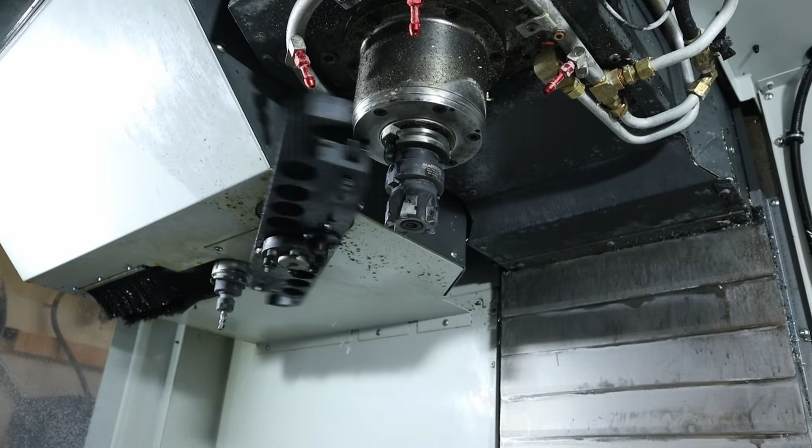I am the 26-year-old machinist trying to build a high-end bracelet and jewelry company to express my machining love for machine precision parts, little assemblies, and playing with materials, coatings, textures, patterns, all that type of stuff. So that's what we're trying to do.

Last week's episode, we built a fixture. This is where it gets awkward. I am completely changing this design, and I'm going to show why. Someone in the comments caught it in the last video, and I was also thinking about it, and I'll explain that in a second. But we were able to salvage a lot of the work that we did last week, so I'm happy about that.

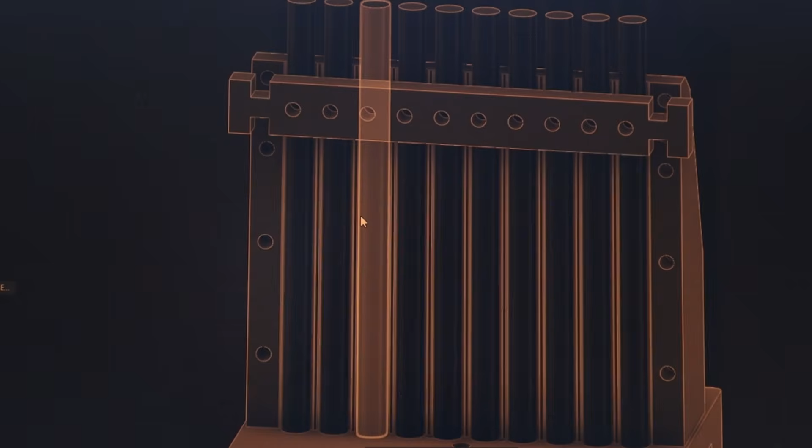So this was the current design that we have machined down there. We have our stock standing vertical. We were going to machine this angle for clearance. The problem with this was we were going to make some kind of locking bar that would screw into the fixture. We'd have our set screws here, and that would push into our stock. Somebody commented and caught this in the video, and I had thought of this already, but I wasn't sure if it would actually be a problem. The more I thought about it, I was like, man, I don't know if this is gonna work, because you'd have screws that hold this bar here and here, and then you're gonna have set screws pushing in, and most likely those set screws are gonna bow this bar out, and in the end there's just gonna be zero clamping force on these actual dowels of material.

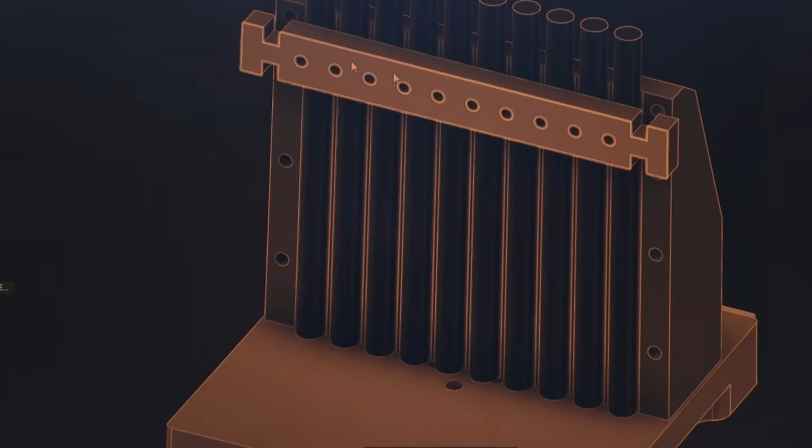So we have two options here. It is currently 9:30 in the morning right now, and we can either spend probably an hour or two to machine this bar and test this theory, or we can completely ditch that method. We could still use this fixture because we have it mounted vertically, and we can do this method that I thought about a long time ago.

It's like this fixture saga at this point, but it's fine because we're learning and having fun, and we're getting content out of this.

This is currently the same block on the pallet. It's offset because our stock was offset, but now I want the stock to be on center. I'm trying to salvage as much work as we can, since we already have this block machined on all sides and already mounted to our fixture.

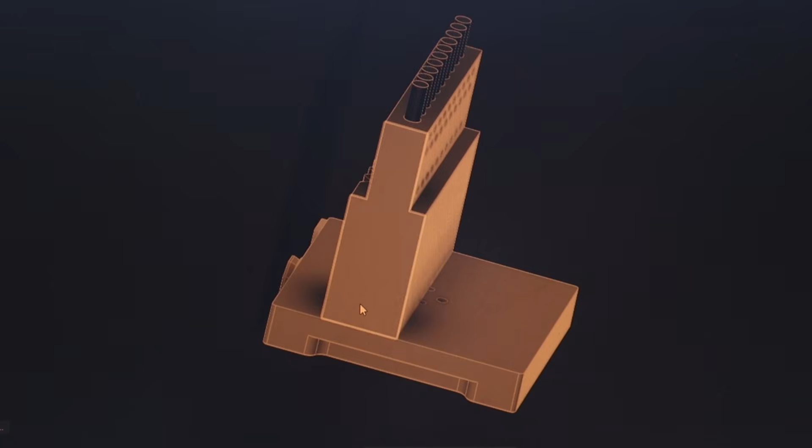So what we could do is take the same stock and drill a hole all the way through. This piece of material is right around 5.1 inches, but the drill I have is only about 3.5 long, so we'd have to drill from one side, flip it, and drill from the other side.

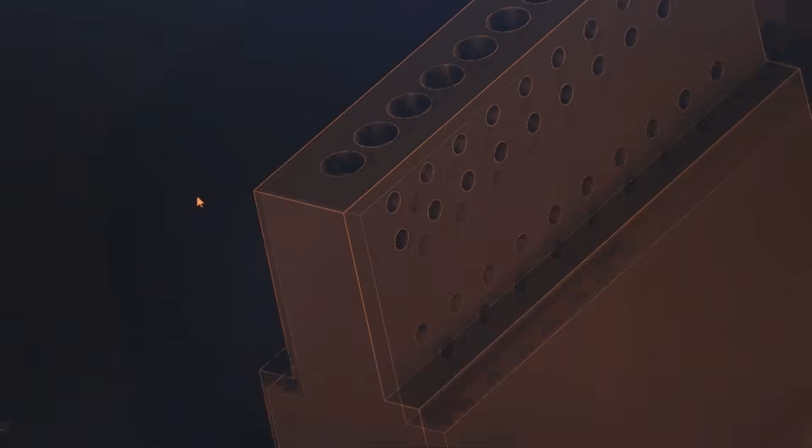Basically, we want to create these holes that go all the way through so we could stick a bar all the way down there. Then we could create relief cuts here so we can get in and machine the parts without any collisions, and then drill and tap holes for our set screws.

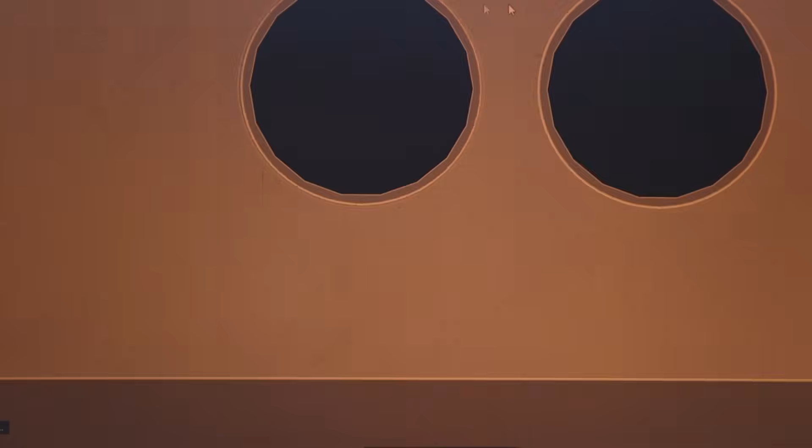This way, wherever our stock went, our bar will be pushed up. Technically it'll be like this—if we move this, it'll be pushed up like that, and there'll be a set screw here pushing it up.

Now, I understand it's not a V-block, and this is technically 2 points of contact. However, I think this is going to be plenty strong, and this eliminates the flexing problem we mentioned, because this is going to be one solid piece. So the simplicity is definitely here.

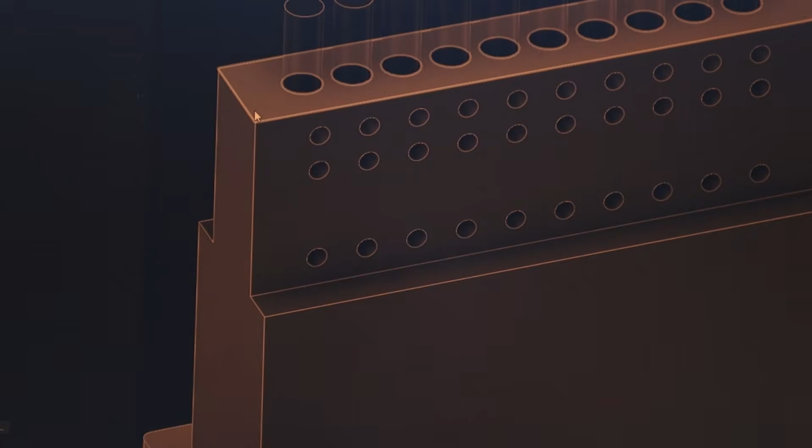I like this. There's a few things we'll have to think about, like machining a cross hole along this to let coolant and chips flow through, and maybe a slot down here—because if I'm machining these parts and pulling this bar up, and I drop it, say it's half the size, it's going to fall in that fixture and I'll have no way of getting it out. If I had a little slot down here, I could use a screwdriver to flick it up and grab it.

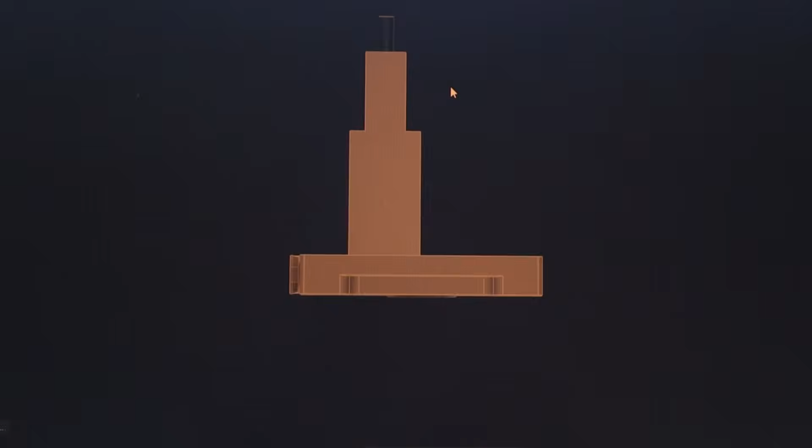I think this would totally work. It's not ideal that this is currently mounted offset pretty far from center line, but it will work because we can easily work in this orientation for literally 90% of the machining. The only reason we flip it is to machine the tab feature, and that's about it. As long as we have plenty of clearance from here to here, which I know we will, we can even put the tool in a longer tool holder if needed.

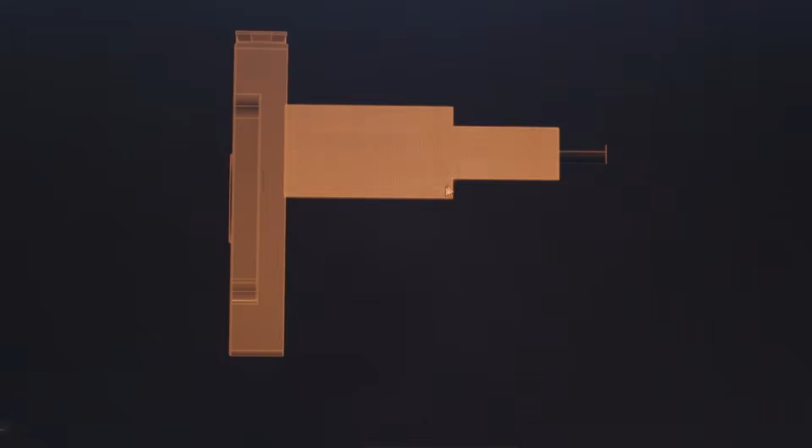Obviously if this was on center, that'd be more ideal, but my whole point is we can make this work, test this theory, and save a little bit of time by not having to remount this to the center of the fixture and drill and tap holes again. So this is what I'm going with.

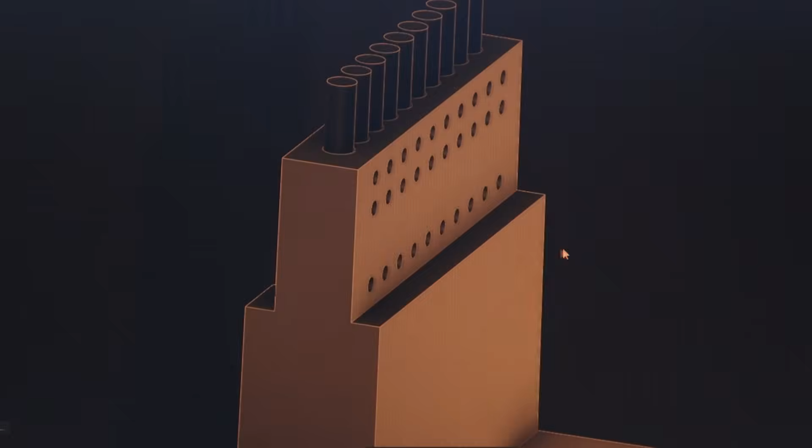So now I'm just making sure I like what I have here, and going to program this, and then we're going to go downstairs and machine this.

What we're going to do is take this piece, counter bore some bores here, 10 bores, and then come in and drill it. That will be my quote-unquote center drill, to try to keep this drill as straight as we can. We're going 3 inches down, then we'll flip it and run this exact same program. Since we're probing on center, we can do that, which is actually really nice here.

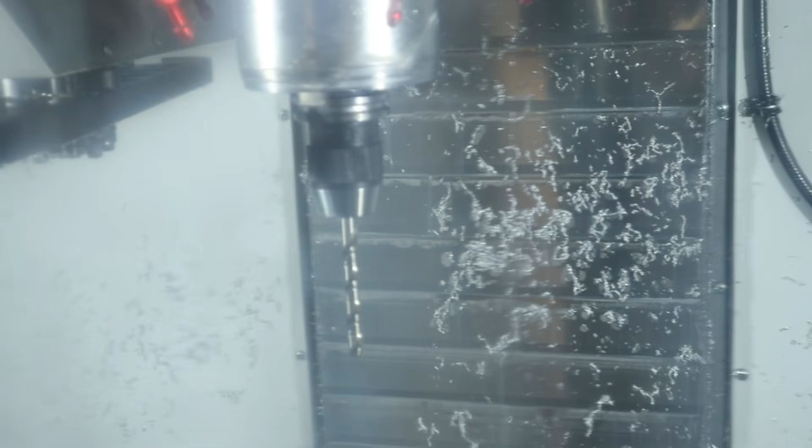Alright, Mr. Drill. So we're going at 1200 RPMs, 1/8 inch peck. Yeah, I think this is going to be fine. It's just going to take a while here.

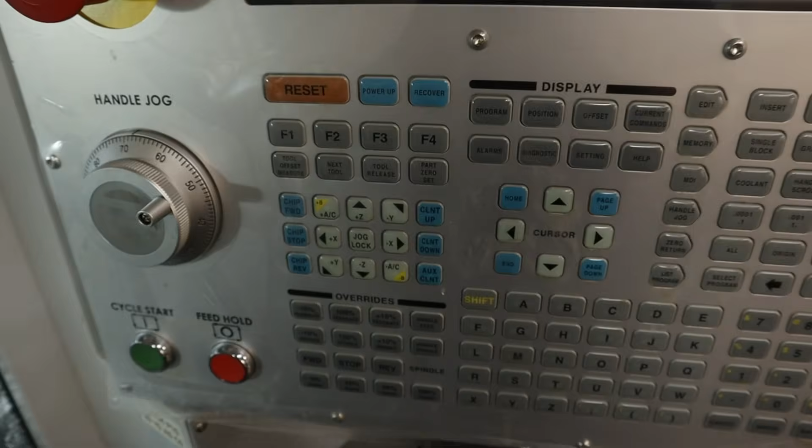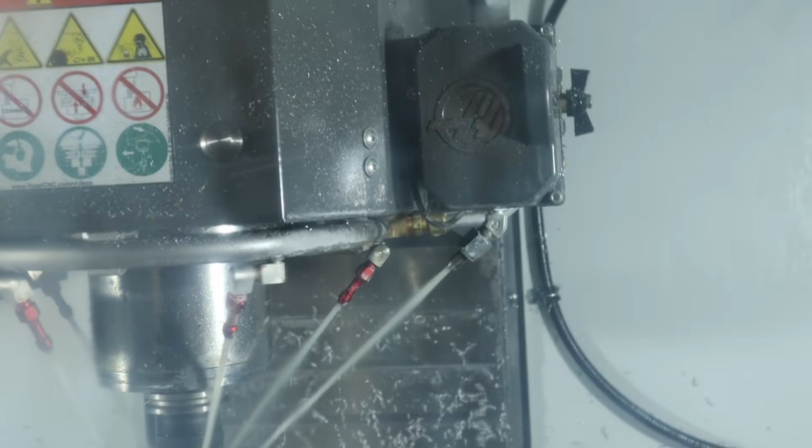So a little backstory while this is doing its thing. When I bought this machine, I had automation in mind, and I bought pretty much every option you can get on a VF2. So I've got the programmable coolant, which I thought was kind of a gimmick product, but it's really nice when you have it. So I have these controls here that I can adjust coolant up or down, and in my offsets page, we're on tool 26 right now, we have a coolant offset. So right now it's set to 11.

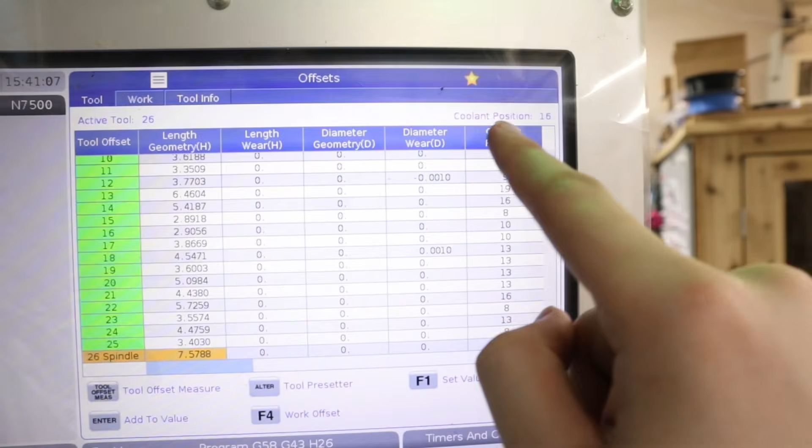So if you look, this stream of coolant is pointing right there. That's too high up for what we're doing. So I'm just going to hit coolant down, and I can angle that down to be more at where the cutting action is. And so that just changed. I have a coolant position up here of 16, so we can go over here and input 16, and if I hit F1, it'll update that. So now every time the machine changes to this tool, just this one coolant nozzle will adjust.

It's actually really handy because, as you guys probably know, those coolants around the spindle, you manually adjust, and they're not always pointing at the right height. As you can see, I'm blasting the holder right now, which is kind of pointless, but to have at least a few coolants hitting the tool, that's all you really need in this case. So again, I just wanted to mention that's really nice for certain applications.

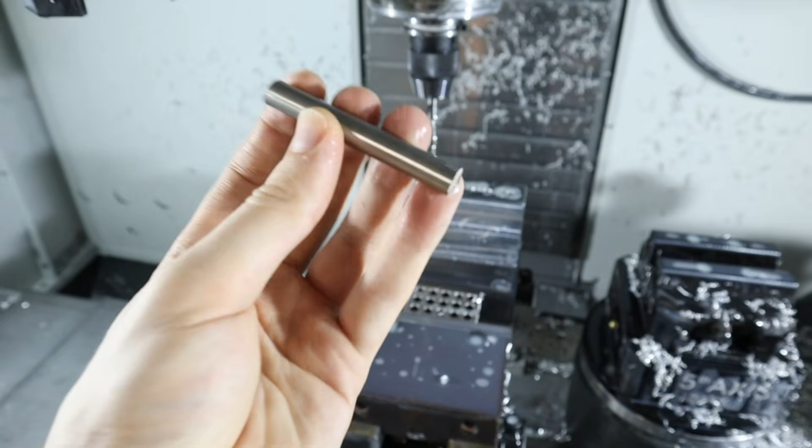Okay, I've drilled 2 out of the 10 holes. Before we go any further, this is a piece of our stainless steel round bar. I just want to do a sanity check. It does fit, there is slop. The reason we are doing a 406 size hole is it's a little bit larger than 3/8. That way, in case our stock comes oversized, we still have a little bit of clearance. So that's the reason why we aren't just doing a 3/8 size hole.

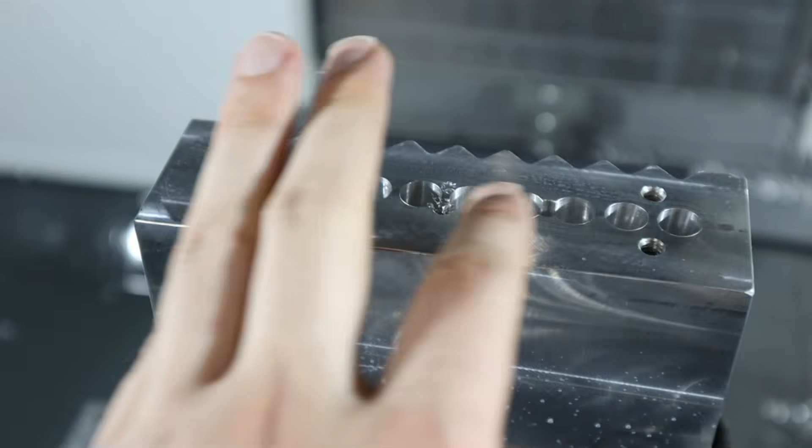Obviously go a little bit higher, so we're about 30 thou larger, which is totally fine. So that's why we're doing it. Looks good, let's keep drilling. Bada bing, bada boom, the holes are drilled. I'm going to touch these with the chamfer tool, flip this, probe it, and we're going to run the same cycle again.

All right, I have a hot take. In a situation like this, this is the face that is going to be down on the pallet, so all we need to do is deburr these holes. Yes, I could have added that into my machine, but all I did was grab a 90-degree countersink. I have these, I literally just hold it in my hand and I deburr these holes. It takes me like 10 seconds, a lot quicker than programming it and running the risk of anything on an expensive machine like this.

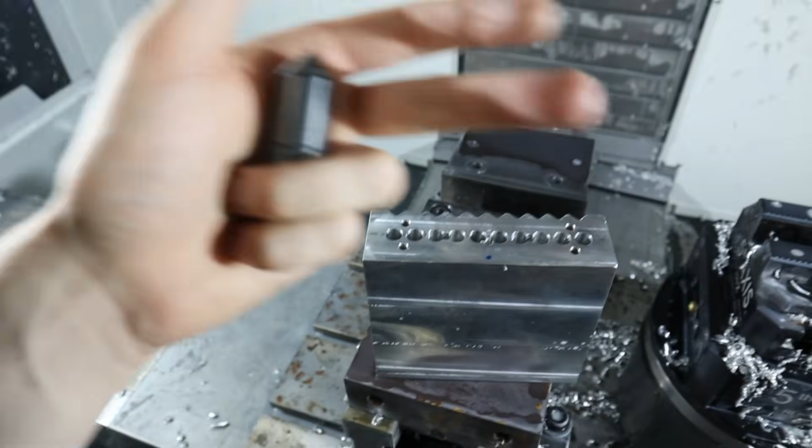And I think what makes a good machinist, in my opinion, this might be controversial, but it's knowing when to go fast and when to go slow. In a situation like this, it's faster to do what I just did, and there's no tolerance to these chamfers. It's literally just an edge break, you're never going to see it again. If this was a cosmetic side of the part and I was making more than one, and it was for a customer, obviously I would do this differently. But you have to identify the scenario that you're in and move as quickly as you can when you can, and slow down when you also can, or you know you need to.

So I'm curious what you fellow machinists out there think about that. I think going slow in certain situations is necessary, but when you can go fast, move on. So curious your guys' thoughts.

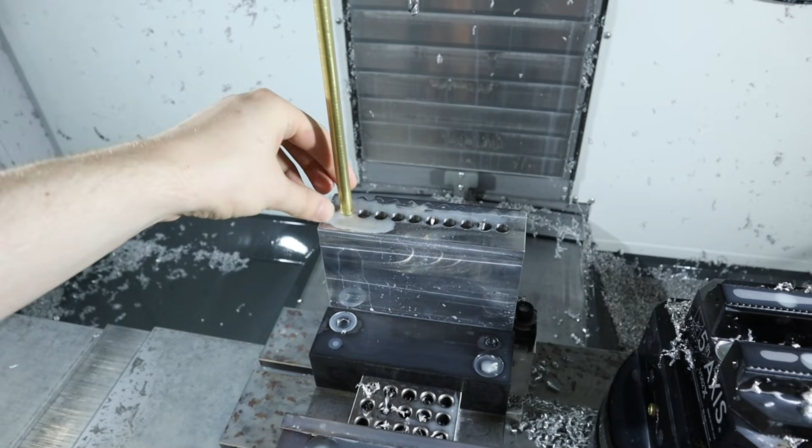All right, we drilled the first hole. So the hole definitely went all the way through. Let's go ahead and run it, and then we can take it out and look through the bore and make sure it's just, I mean, obviously it's going to be a drilled finish. We could ream it, I don't think that's necessary though, and as long as it's somewhat straight, that's all I really care about. But let's keep on drilling.

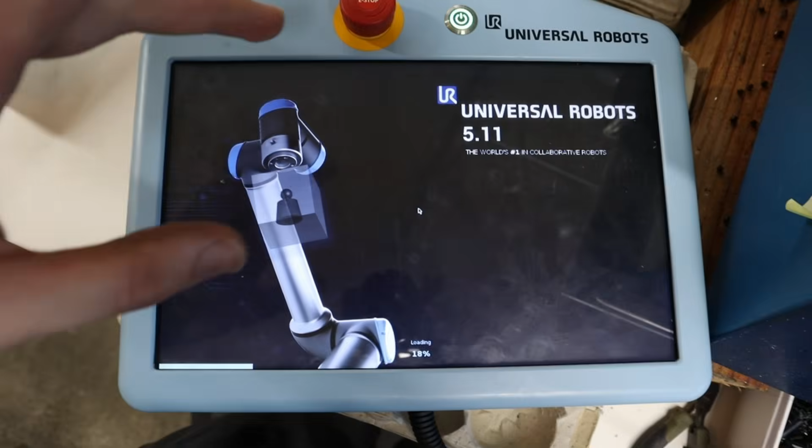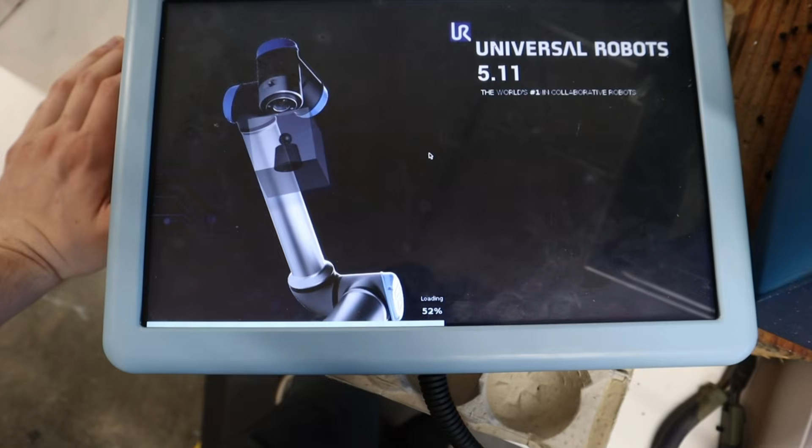So I have to turn on the universal robot because the I/O is set up to actuate my RockLock. So the only way I can take that 5th axis vise on and off is by turning this on and using the I/O here, which is kind of funny. It's kind of annoying, but I don't normally take the vise on and off that often, and I'm not using the robot, so it's just one of those things.

But we'll turn this on and I can show you how I toggle the I/O on the RockLock. Okay, I don't know if you guys will be able to see this. Maybe if I hold it up to the light.

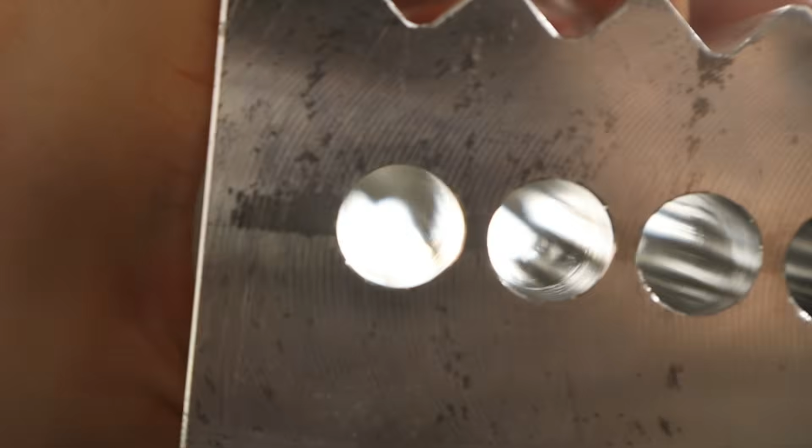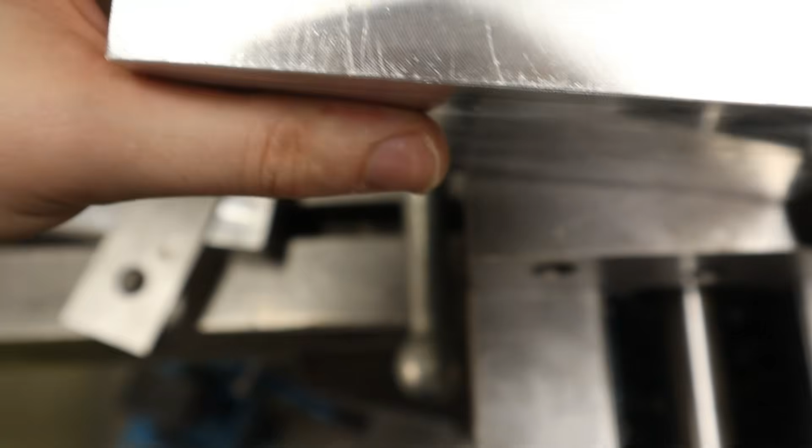I'm actually really surprised at how well this worked out. I think looking at it, the holes matched up definitely within a few thousandths, maybe even better. So I'm very happy with that. I even took a piece of material, put it in there, and pushed it up to one side to see if I could feel like a step in the center there, and I couldn't. So I'm very happy with this.

It's also funny how lighter this is already from all the metal we've taken off. So I'm going to measure a few things, make sure that this is where it's supposed to be, and then we're going to set this up. Actually, we're going to remount it to the pallet, and then we're going to put this in the 5-axis, and we're going to mill some features on it.

So we got lucky that the dowel pins still have enough of a surface there, and our threaded holes are good there, except for this one. I still might thread a bolt into there, and the only downside of these is that's going to remove like 3/8 of an inch that our stock can go down. So that either means our stock's going to stick out 3/8 of an inch longer, or our initial blank size will be 3/8 of an inch shorter because they'll be hitting that on the bottom.

But after the first part, it won't matter. So that is something to consider. I could move those over to gain that back, but I think for now that's totally fine. So let's go ahead and put this back on the fixture plate, or the pallet itself.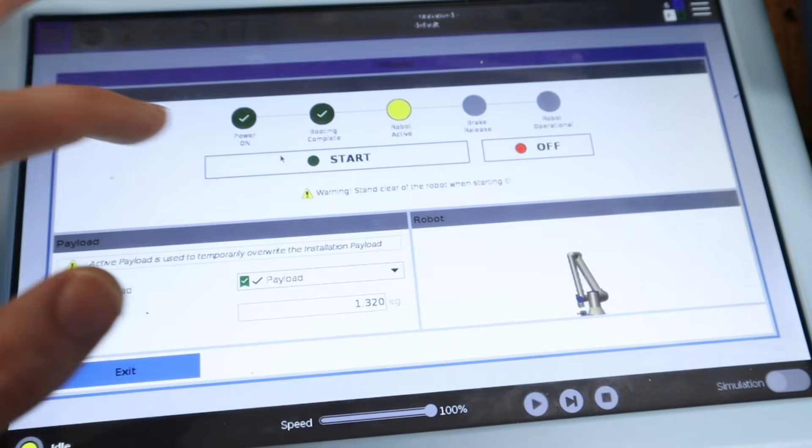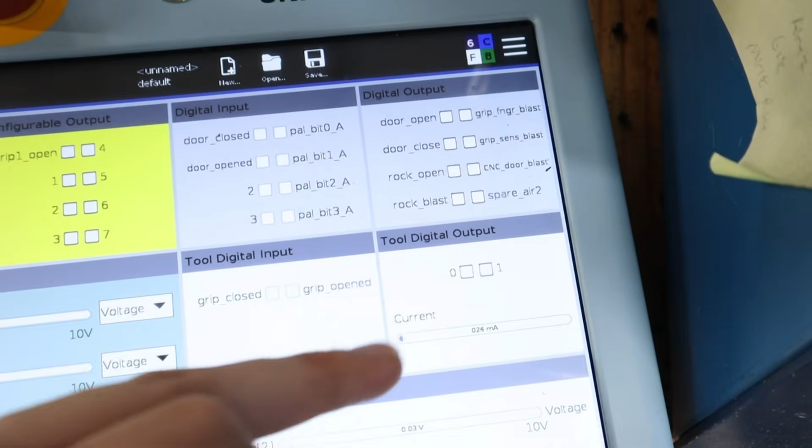All right, so first step, got to turn the robot on. And then we can go to our I/O, and then we have the rock lock open. So now this should be able to come off, which it does.

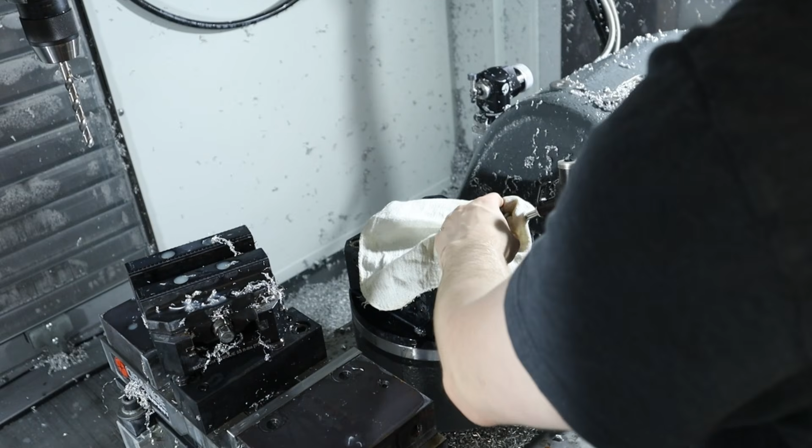And we're gonna have to clean this bad boy off. Since I don't use this a whole lot as far as swapping stuff, at least right now, I try to clean it pretty good. It can get pretty dirty and packed with chips. It's actually pretty surprising how much chips can get in there, even though there is a vise sitting in it.

So, okay, I'm fine with that. So now this guy, let's see, it would go on like this with the robot, so we probably should stick to that. So now I'm going to go back over to the robot control, hit rock lock off, and this should suck down and be set to go.

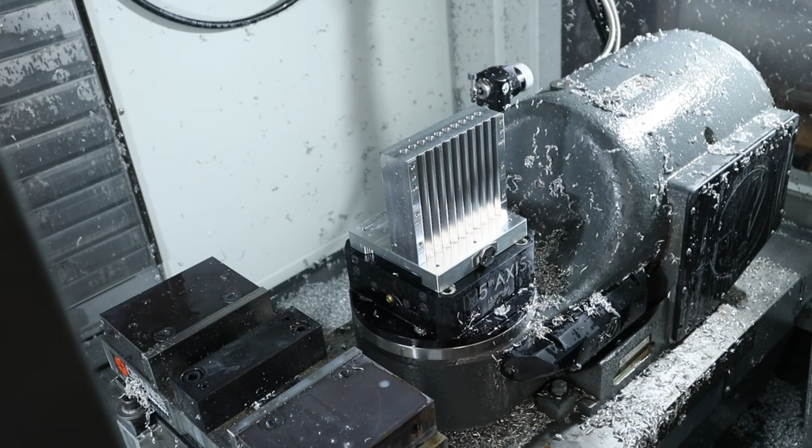Okay, I'm going to take this guy out of here because this thing is kind of a beast. Take him out, and then we are going to have to probe this.

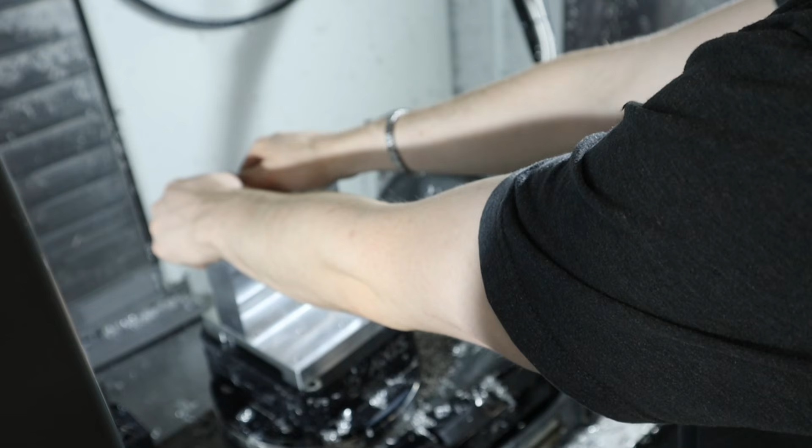Yeah, this is exciting, this is looking good. So, yeah, now I got to probe this, make sure it's in the right orientation, and yeah, we should be good to go on the next op.

Well, that's not going to work.

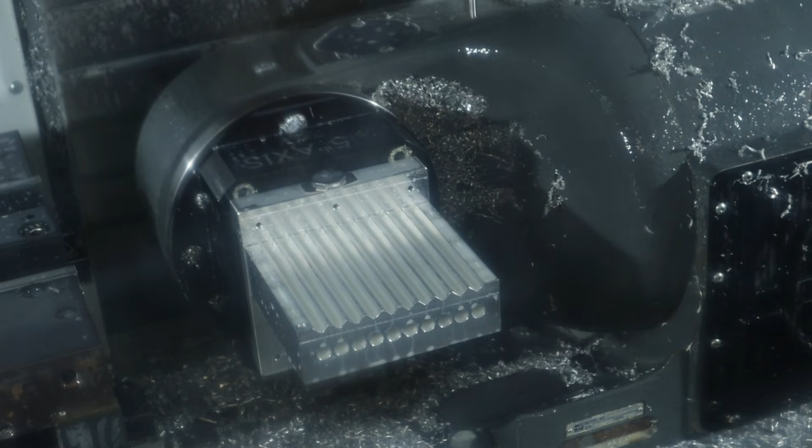We got our post working. That took a lot longer than I thought. Now, we should be off to the races here.

This is definitely a heavier cut than I thought I programmed. So with that being said, I'm gonna go double check that.

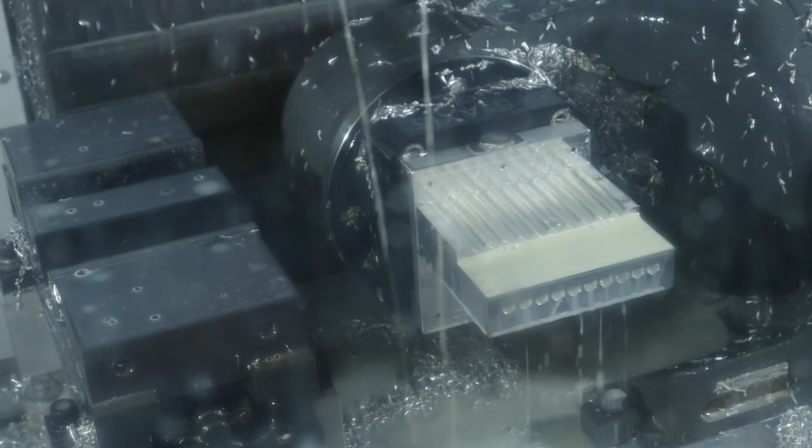So that's the cleanup contour right there. Okay. So before that moves, let's go ahead and take a look. Perfect. So we cleaned up that edge. Again, that doesn't really matter. But yeah, this is looking good.

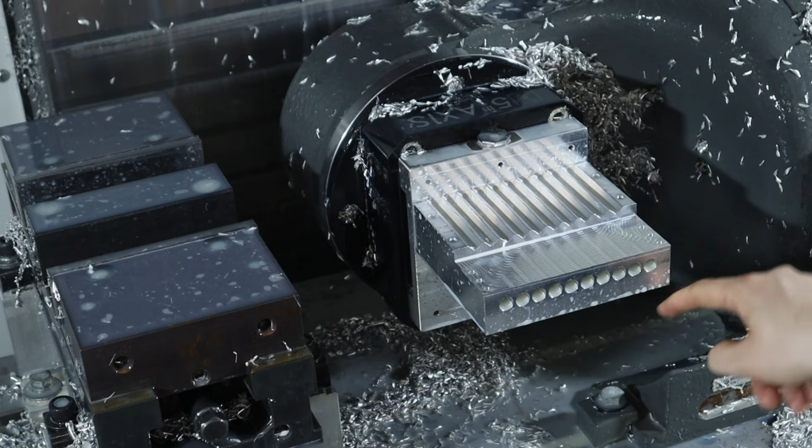All right, so now it's gonna flip over. You're not gonna be able to see that, unfortunately. Hopefully this tool's long enough to get in here. This is gonna be kind of tight. Oh boy.

That's as low as it's gonna go. And that's as far back as it'll go. So I think we're good. I don't think you guys really need to see that happen again, so I'm gonna go ahead and turn the camera off, machine this, and I'll come back.

You can see what I mean with this not being on the center line. Definitely need longer tool holders to just give us a little bit more clearance, just to make ourselves feel a little bit better.

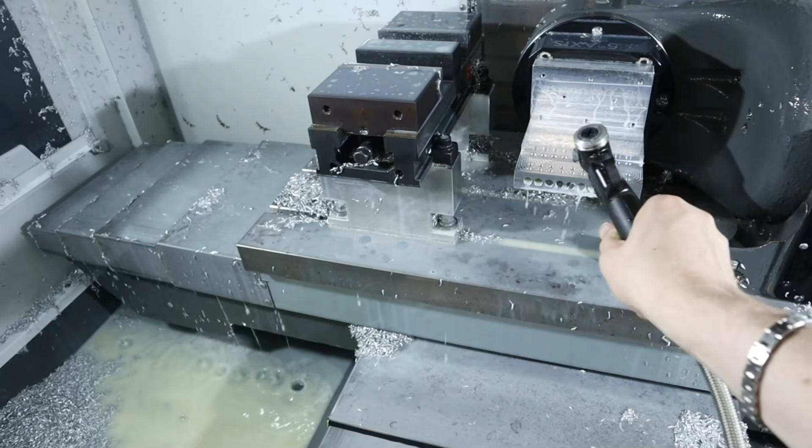Through spindle coolant, and we'll come back, chamfer and tap, and then I think that'll be it for this fixture, guys. All right, we got chamfers, time to tap.

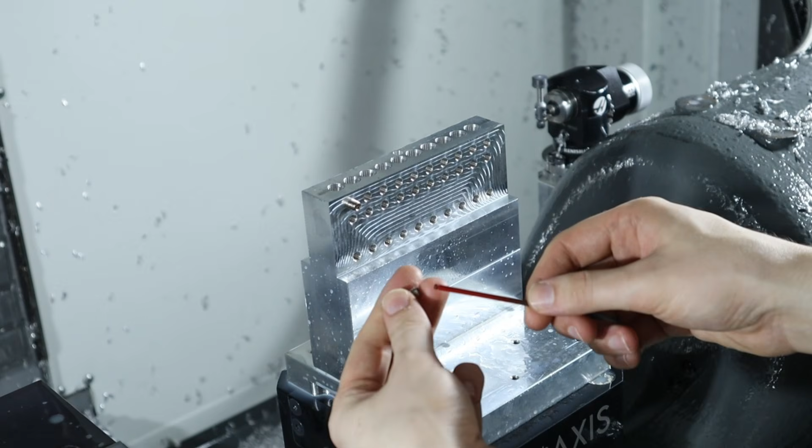Okay, fixture is done. Moment of truth. Pre-thread those in. We're gonna have to deepen that edge, but is this piece gonna be long enough? Yeah, so this is what I mean. I can easily drop this and lose it.

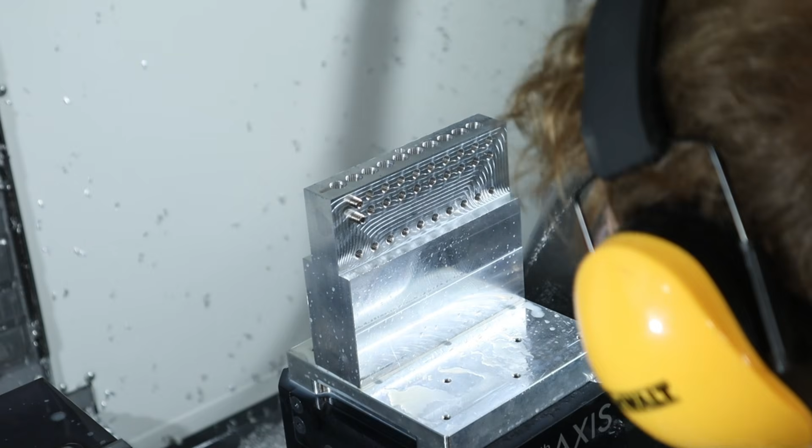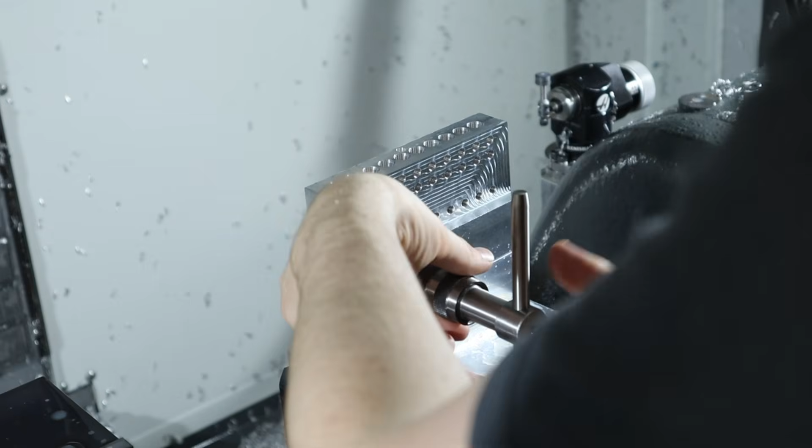Let's see here, what's going on? I don't know if we went all the way through with our tap, so I'm gonna have to manually retap that a little bit. So it looks like I didn't go deep enough. I could have sworn I did. We'll just test this first slot or this first position. Because yeah, I was putting in the set screw and I was like, why is this bottoming out? All right, there's that one.

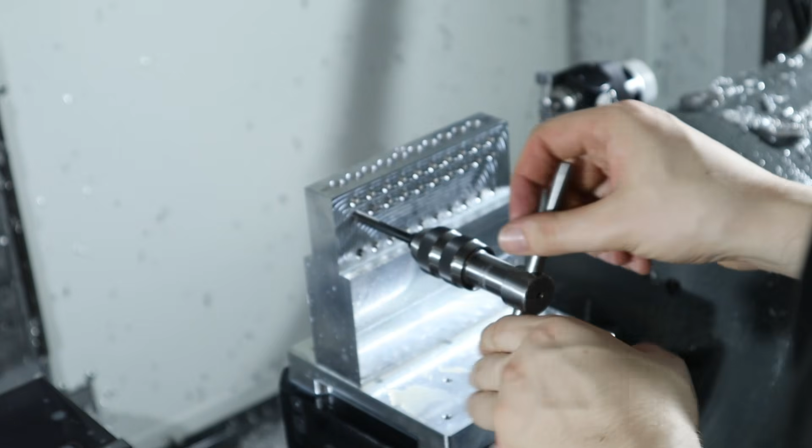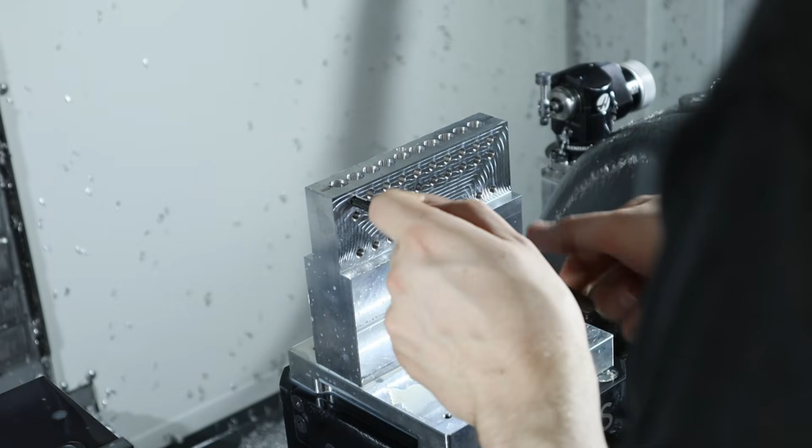All right, let's do this top one. I'm gonna have to break some of these edges up top. Just enough of a chip that would stop that set screw from going in.

Let's try this again. All right, there's one — I'm just snugging this right now. Two. Okay, so those are just snug. Now let me actually give that a little bit of English.

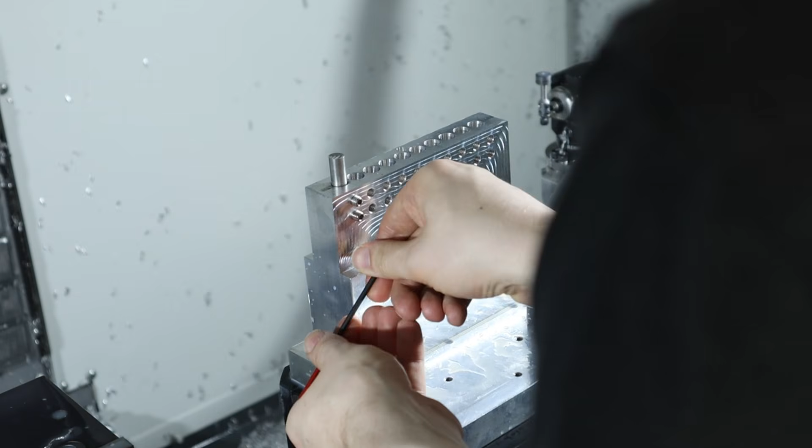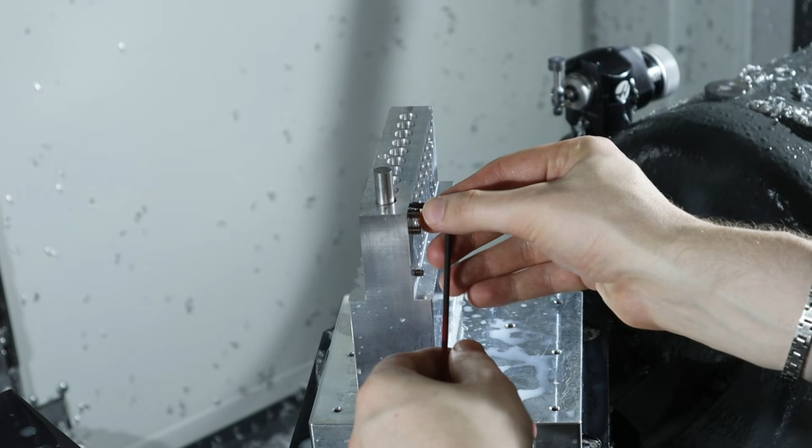Oh yeah, I don't think that's going anywhere. You guys still see that? Yeah. I think that's gonna work. We can figure out a torque spec, but I think that's gonna work, guys. I'm liking that a lot, actually.

So here's what I'm gonna do. I'm gonna edge break this. I might put that tap in a drill and just clean out those threads, go all the way. And then I'm gonna cut some pieces of material and let's pretend to load this up.

So one 3-foot bar gets me 2, 4, 6 — six-inch sections, roughly. One's a touch shorter, that's just because of the blade width probably. So in theory, the way I would load this would be — so that's the long one, because of that screw.

So yeah, this is what we gotta figure out here. Okay, so that's the short one, and this will also be a short one. So the question is...

Is this too long from a machining perspective? I know we're starting to get close to our Y travel here, so it's probably best if we actually put in a tool and see how far out we can go. So let's go ahead and do that.

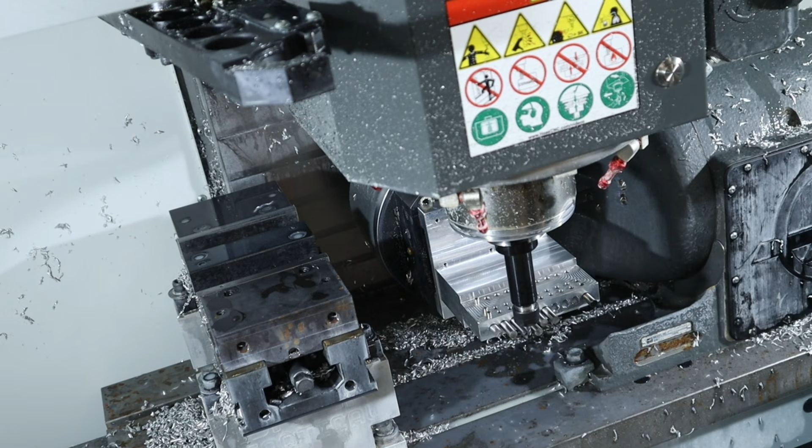I think if we get this out of here, we get this table closer. So I think this longer length is actually okay.

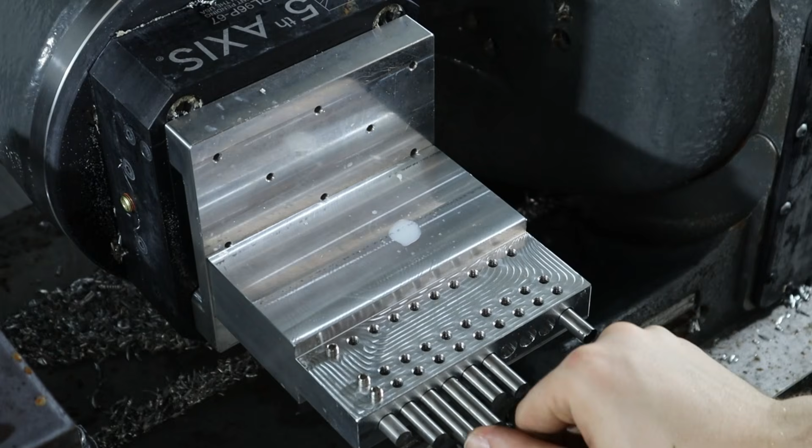Hey, when you're good with the bandsaw — that was supposed to be 6 inches, it's not bad. So like that's a long one, and then it'll go in even more over there. So I think we're fine.

The question is, obviously this is more rigid than this because it's sticking out probably another half inch, but I don't think that matters in this case. I think we're fine. So what is the rough number here?

Call it 1 3/8, it's sticking out. So if that's our number, we're gonna have to make a little fixture, maybe a 3D printed thing that goes under here that we can push all the stock up against this ledge and then tighten them down.

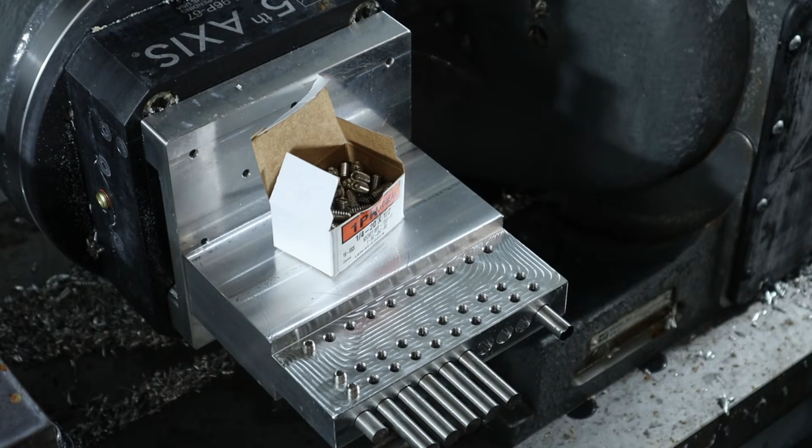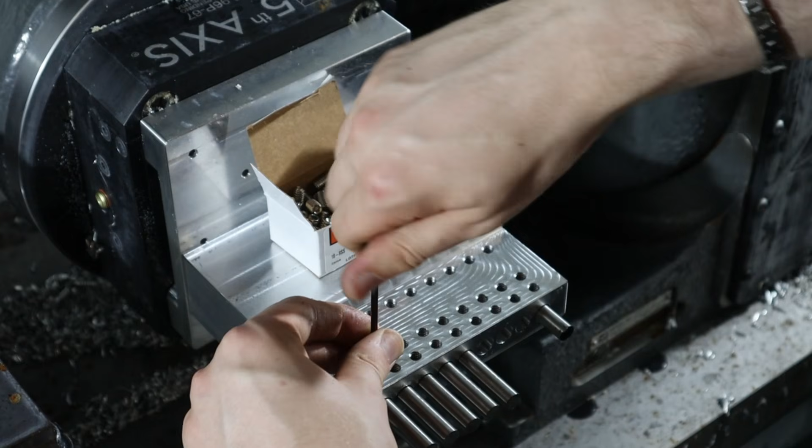But let's go ahead and put some set screws in. Now, one thing I don't like about these set screws is I don't know if they're metric or inch for the hex. Metric is sloppy, inch is also pretty sloppy, and I don't want to strip these. So I'm curious if McMaster sells some with a Torx pattern or something, because I just know these are going to strip.

Now, one other thing I do want to show — I can show you on this piece of material here. I think this is going to be extremely rigid. I don't know if you're going to be able to see this, you're going to have to trust me, but there's some pretty good bite marks from the set screw, and I think that's acting almost like a Talon jaw.

Yeah, so we definitely need a little printed something or other to set the length. I guess for now we can probably just use — yeah, I definitely want to make a little fixture. So that's something we can work on.

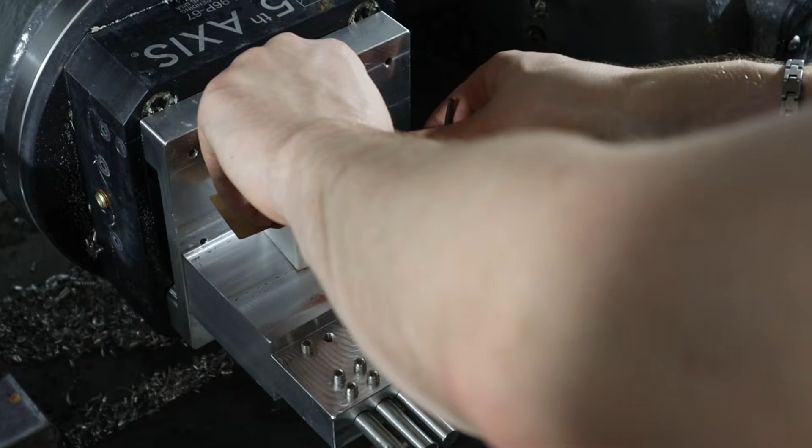But in the meantime, I'm just going to thread these in. So I think I want to get a Torx pattern or some other drive for these set screws, and then shorter — there, you can see a little bit long here. These might be good for the smaller stock when we plan to make the screws, but for now they're kind of a clearance risk.

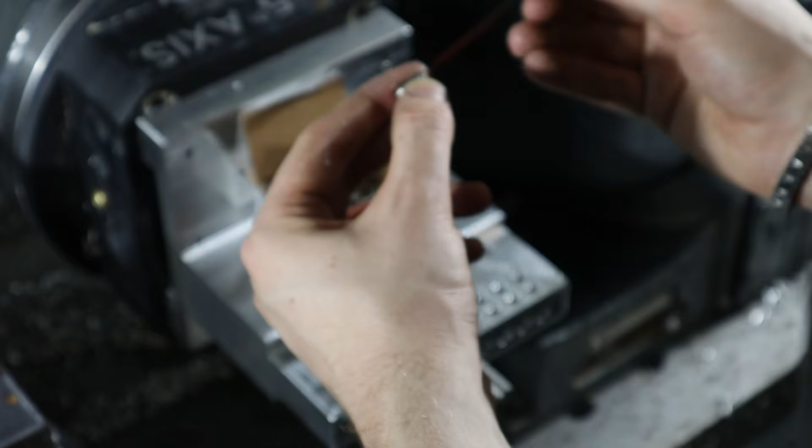Now the other thing I'm curious about — if anybody has some good links to where I could get steel instead of McMaster. Love McMaster, but I just know it's not the cheapest. It would be really nice to get this pre-cut to 6-inch lengths. Another thought is finding a Swiss shop with their remnants and drops, if they have 3/8 material that I could buy for cheap. So if you guys are working at a Swiss shop and you have remnants in 3/8, I'd probably be open to buying almost any material.

It's nice loading this when it's at 90 degrees here, because I don't risk losing the bar in the fixture. I guess with this being the first bar, that's not really a risk.

So I'm just snugging these, but I definitely want to make a fixture to make sure they're all at the same length. That's going to be pretty important, so we can do an initial facing pass to kind of cut them to length more or less.

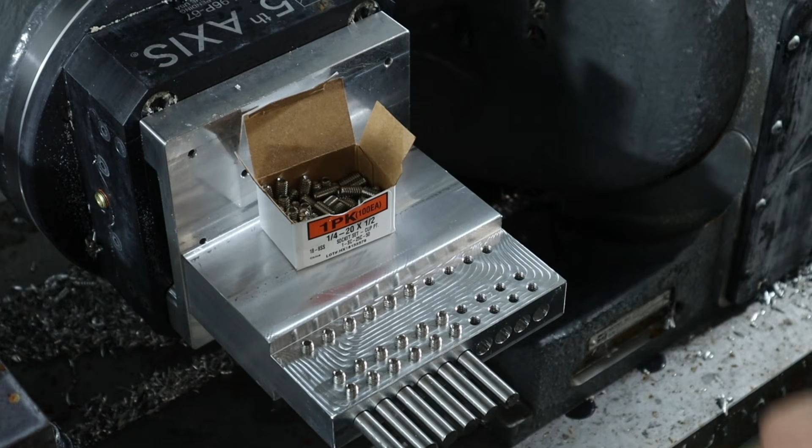All right, those are just snug, and I'm very happy with this. So I'm going to put in the rest of the screws. Actually, maybe not. It's kind of a waste of time.

So let's see. I kind of want to go design and print that fixture real quick. That wouldn't take that long. I might go do that.

Okay, I made a 3D printed jig. It fits on there, and we can slide these out, and it should be 1 3/8, which is what we want. Yeah, this is sweet. So I can just hold this.

Some of these are still tight. So I did this, and while I was waiting for this to print, it took about an hour, I actually programmed and patterned to machine 10 links. So we're gonna go for it, guys. I want some significant progress this week.

What's nice is I can actually rotate these and I can see if there's like a high edge or not from the bandsaw. It's actually really nice.

Okay, so we'll hold that. And we can just go in and snug down just one screw at least. And again, in full-blown production, a pallet will be running while we do this offline, because this is a little time consuming. Okay, so yeah, those are all snug just on one screw, but I love that.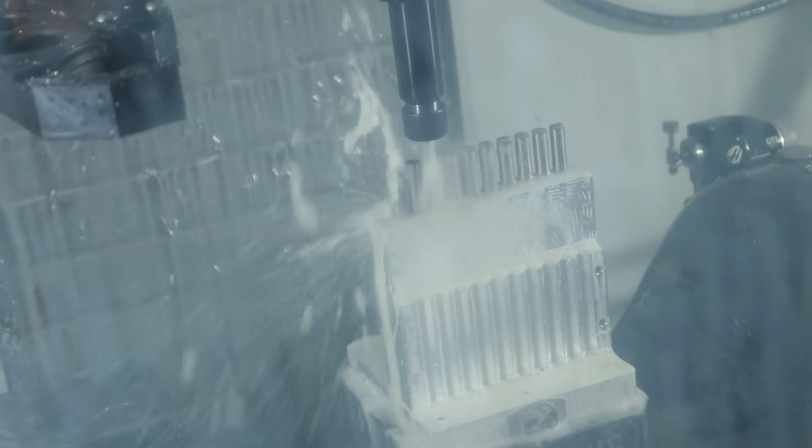And of course you guys can't see anymore.

So here's a good example of where I think we could save a lot of time if we made one continuous tool path to do what it's doing now, so there's not all these retracts. I mean, that would be, if there's 5 per part, let's say, it's probably more.

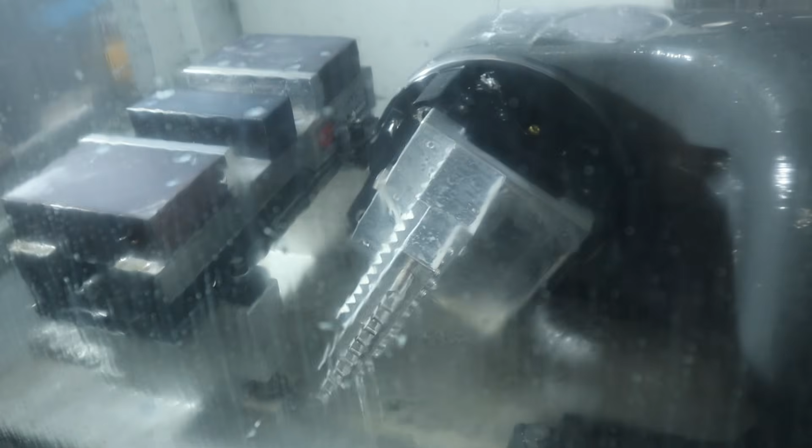All right, let's see, what are we doing here? We're just facing the back.

So yeah, I'm trying to think of everything I can that would speed this up, because we really got to be able to make these pretty quickly, like I've been saying.

It's not from a, oh, I got to be extremely profitable, but a bracelet's going to have like 50 parts in it. And even if I sell it for $500 or whatever it is, I mean, that's only $10 a part. There's a lot of work that's going into these parts, a lot of labor on top of the machining time. So I just got to make sure I can get the hourly machining rate to something that's not like $40 an hour.

Okay, so we're facing those off. Do you guys like the commentary as we machine? All right, what are we doing here?

Okay, so yeah, we're doing this roughing again. I think that alone could save 3 seconds per link easily with the retracts like we're doing right now. 3 seconds per link per side, so that's 6 seconds per link. 6 times 10, 60 seconds. I think we could at least get a minute off this program from doing that. Plus the finishing, maybe a minute and a half.

All right, here's a great example. This fixture was just flipped 180. We chamfered the parts on that side just fine, plenty of clearance. Now with it being a few inches lower, it's chamfering here. By the time it gets over there, I don't know if you can see that, that sheet metal would definitely crash into the probe. So I'm gonna pull this tool out and put it in a longer tool holder. Even something just like this would make a huge difference. So let's go ahead and do that.

Okay, I went with a way longer tool holder just to be safe, and it was open, so hopefully the run out is fine on this. This is currently the side that's already been chamfered. It's just easier if I rerun this real quickly to get to the next part of the program. So I don't want to have to repost right now. So this is all air cutting right now, and it'll flip and we can check that clearance.

But I'm glad I caught that, because that was a scenario where it started all the way over at the left and worked its way to the right. Normally it's right to left, and I can see that probe right away. So long story short, always check your clearances. That is the one downside of having the probe all the way over there, but it is what it is. So I'm glad we caught that.

Right now it's just kind of spot chamfering the link hole where the screw goes.

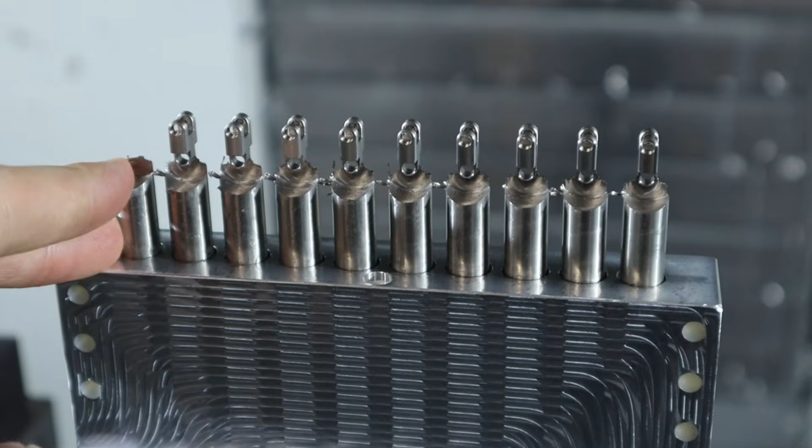All right. Isn't this gorgeous? Ignore the one that already fell off because my depth was wrong. Look at that, guys. That is amazing. So it originally was set to 0 stock to leave. That's why the first one fell off.

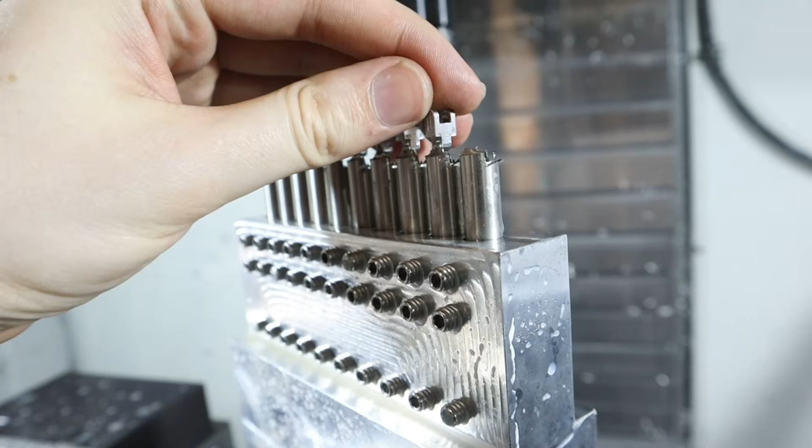Then I set it to 10 thou, and the tab was too thick. Now it's at 5 thou. They're still very rigid, so I'm tempted to go down to like 3 thou. I'm just trying to figure out what's the best course of action to get these things off. Because if you guys remembered our problem last time we did this, we don't want to tear out this material. So, yeah, I'm trying to think what's the best option here.

I'm going to think about it. I'm going to go eat some dinner. It's getting late, but I definitely want to finish this before I end the video.

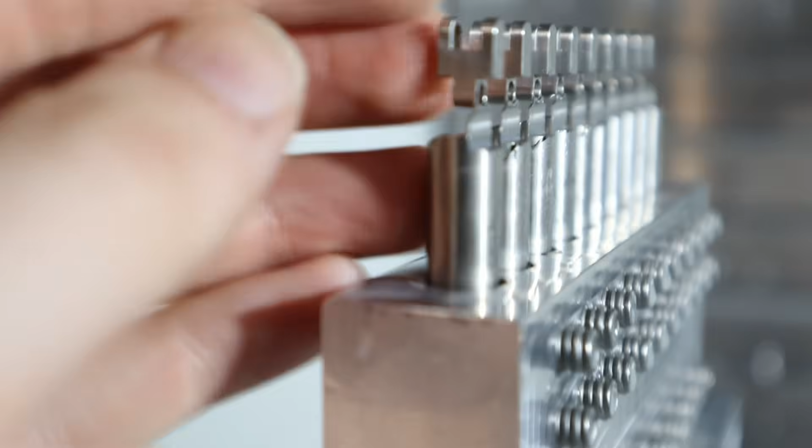Okay, so I just added a contour toolpath. I don't know if you can see that flat line I just machined. That gave me a little less material there, but it allows these to flex way more. So I'm just whittling away at that material. But what's also nice is this will give us a good reference edge with our little fixture. When we go to pull these out, we can set that as our new top of stock, and all this weirdness will get machined away.

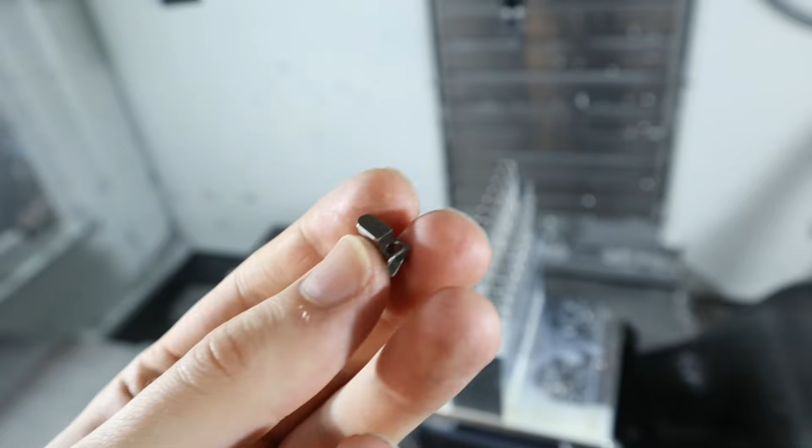So I'm gonna try to break one of these off here. I'm curious to see where it gives. Okay, that's good. That's what we want, we want it breaking down there. Now I just got to be careful because this is going to be very sharp. So this is definitely better than the part getting chipped out, if you will.

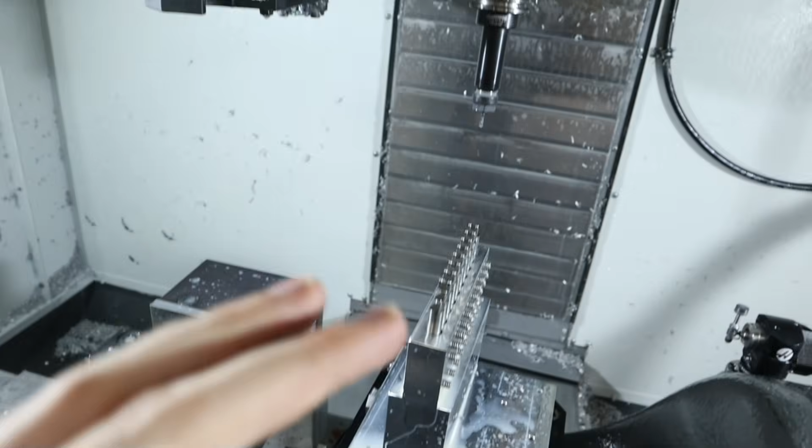So again, we still have to figure out our Op2 fixture setup, but guys, we just machined 10 links and I think the total cycle time was right around an hour. So Fusion's definitely off, but I was able to reduce at least 5 minutes of that by increasing lead in and lead out speeds while this was running. So we're at an hour now. It might be less than an hour, a couple minutes shorter with the updates. But I am going to do a bunch more updates. So let me flip the camera around here.

All right, first of all, how sick is it what we just did? I'm so happy that this worked out. I understand we had some fixturing problems with the first design, but this design I think is going to be awesome. There's a handful of adjustments I want to make, so I took notes on my phone and I want to go over all of these things I'm going to be changing in the future.

So first step, I need to order end mills. I need to order some 3/16 end mills, find a good brand that I like. And then we also want to order some 9/64 end mill, those are about 140 thousandths of an inch diameter, a little bit larger than an eighth of an inch. The reason why I want those is I want to decrease the cycle time. This little slot here, we currently machine with a 1/8 inch end mill, it's slow, and I think it could be increased by getting a little bit larger of a tool.

And I think instead of an adaptive, since all the links are lined up, we just do one long simple 2D contour with a sketch with a line, and just slot this 140 thou. Our slot width is 150, which leaves 5 thou on each side, perfect for a finish cut. Then we can come in and do our finish cuts, cut our edge chamfers. It'll be perfect. I think that'll speed up that part of the cycle a lot.

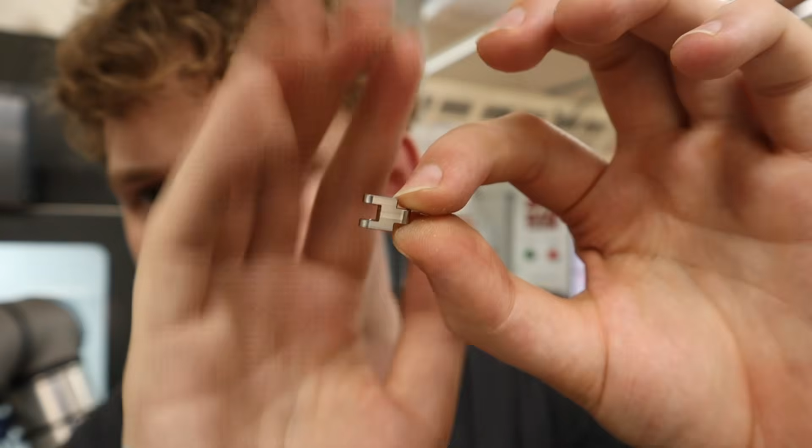Roughing and finishing tools, we definitely need to dedicate a 3/16 rougher and finisher. We're using so much of this 3/16, I can just see in the future I'm going to be frustrated with surface finish, and I want to basically just have a finishing end mill that will do the walls of this, and then we could use the end of the end mill for this, which is actually perfect. So we could use one finishing tool, just the sides for this and just the ends for those two surfaces, and then a rougher to do the rest. A lot of roughing.

Then changing that first toolpath on the facing, I don't need to be using the 3/16 end mill. I could use a 1/2 inch end mill. I actually already have one set up in a tool holder over here. Yeah, this is what I had in the machine, but I just took it out. So using something like this to come in and simply face the top of that stock just to give us a good reference plane, do that in one operation instead of three little paths. Using a larger end mill is just time saving, and that way that can be a dedicated tool for that operation.

And then finding a different internal deburring tool. There's some little burrs on the inside of these links that I want to figure out.

The other thing I haven't mentioned yet is I sent out some links to get electropolished. I'm very curious to see when those come back. I'm willing to bet I'll have them this week, and I can show you guys next week. That will kind of start to blend into the surface finish and how we're going to actually finish these parts. I'm very hopeful this is going to work. Shout out to whoever commented about electro polishing, I think it'll work really well. I'm very excited to see the finish and quality of them. That's also something we've got coming next week.

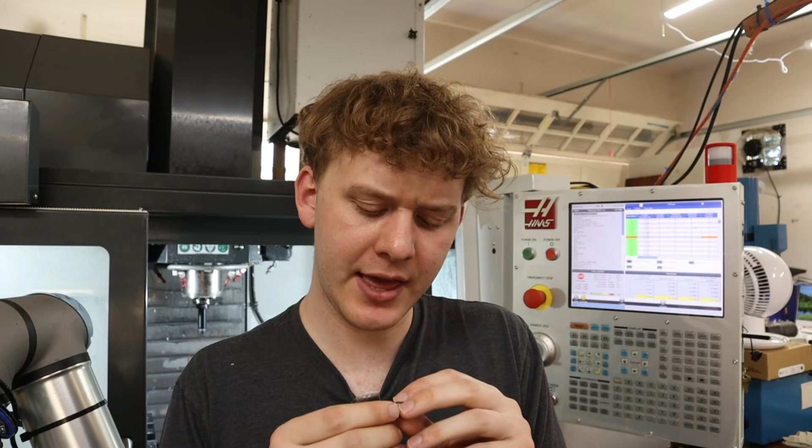I'd like to think we are to the point where we could at least do op ones of these links. I just don't think I want to get into production yet, I feel like that's foolish. So I think we will continue to figure out what our op 2 fixture is, and we'll dial in this program. But I feel like next week we should skip straight to screws and machining screws. I think getting that under our belt will be good, because I can easily tweak this program and we can just test it when we go to do production. I'm not too worried about that.

So it's minor tweaks of the link program, which is what we were working on, op 2 fixture, and then next week we could use the same fixture to do the screws. Once we get screws, I wouldn't be opposed to making a handful of screws and links at that point, because the clasps are kind of their own separate pieces. So if we can get screws dialed in next weekend, get those good, because now we have links we can test those with, since these are as close as they're going to get to production links, and go from there.